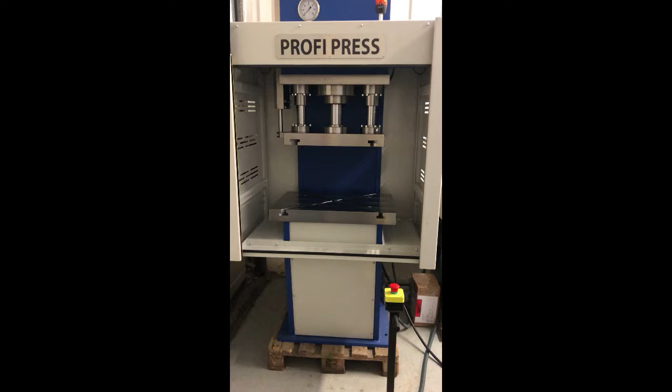I'm going to give a little rundown on the Profi-Press from RHTC PPCM-50 C-Frame Press. Bear with me, I'm doing this on my own, so it might be a little shaky, but it should convey to you what the features are of the machine. The PPCM-50 is a C-frame press from RHTC with 50 tons of pressure.

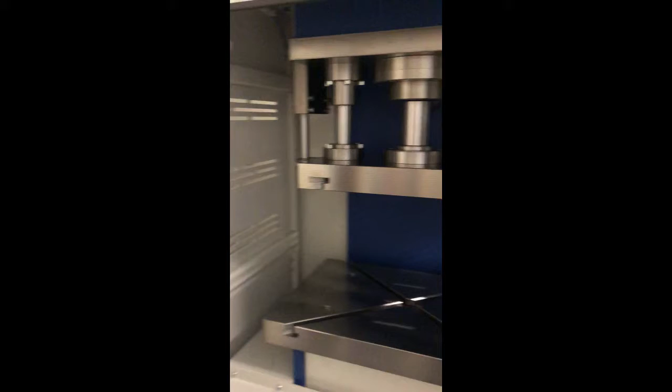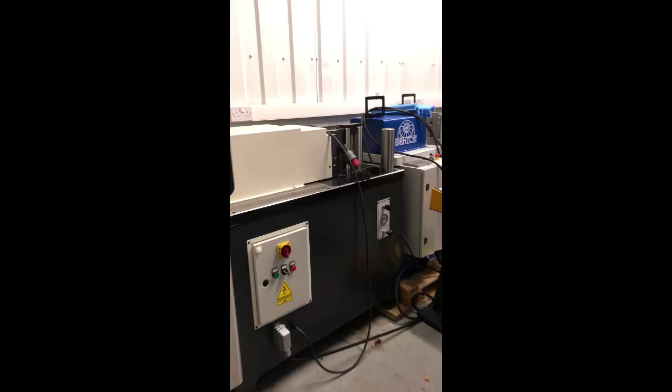It has photo cells for safety features, so if you're using it in operational mode and the barrier is broken, the press stops dead and you have to reset it. These side curtains come open with these knobs, so during manual mode you can set up your dies, your jigs, your fixtures, whatever you may have. There's two knobs on these sides. This side also.

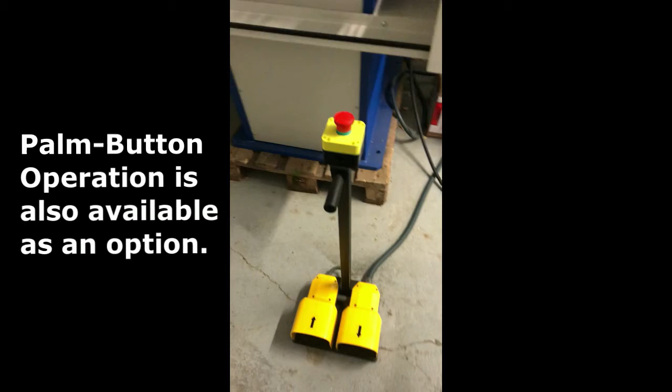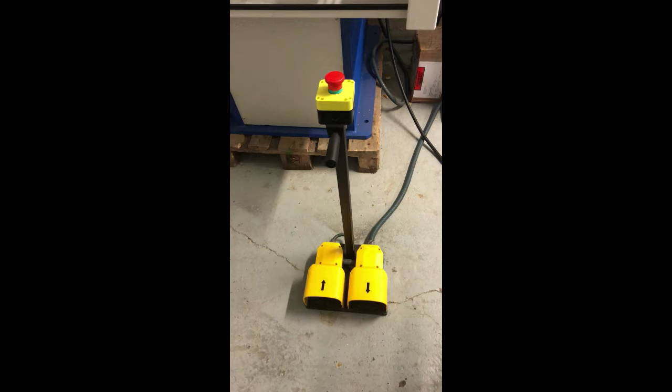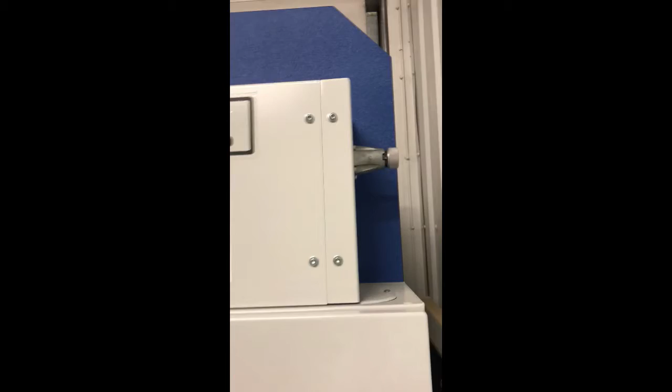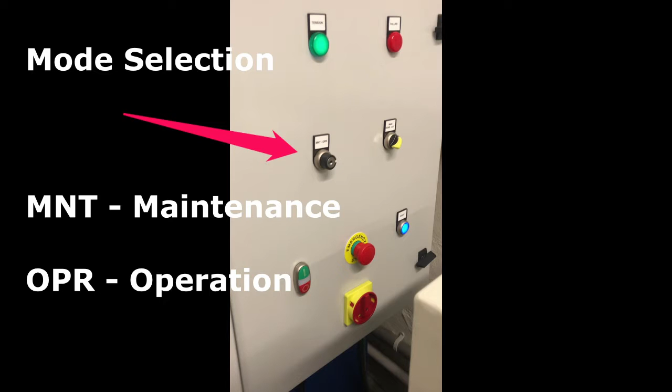There's a foot pedal operation. One foot pedal is for the down function and the other foot pedal is for the up function. The down function is primarily used in automatic and semi-automatic mode, whereas the up one is used in the manual mode for setting your tools up and other similar operations. There's a nice big pressure manometer up there to see what kind of tonnage you will be experiencing. There's a pressure adjustment valve on the back there. And then here's your control panel.

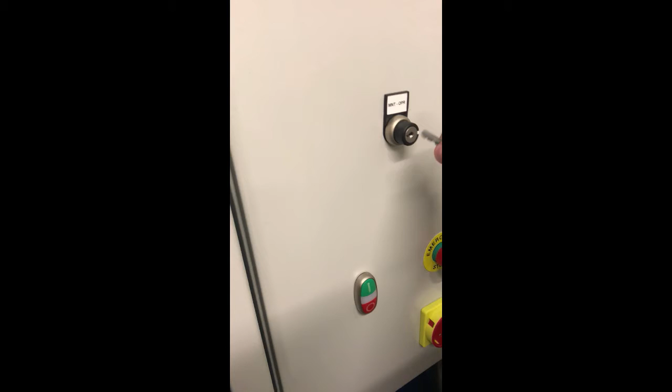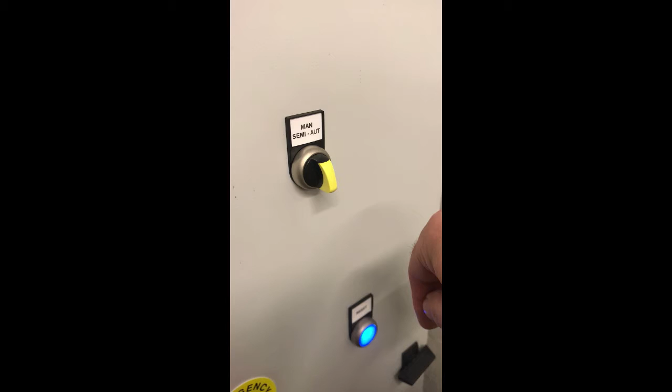There's two operation modes: maintenance, which is MNT, and then you have the operation mode, which is when you're doing production work. There's three different modes. In the operation mode, you have the semi-automatic, the manual, and the automatic modes. Manual mode is usable in both the maintenance and operation mode, whereas the semi-auto and the auto are only used in the operational mode.

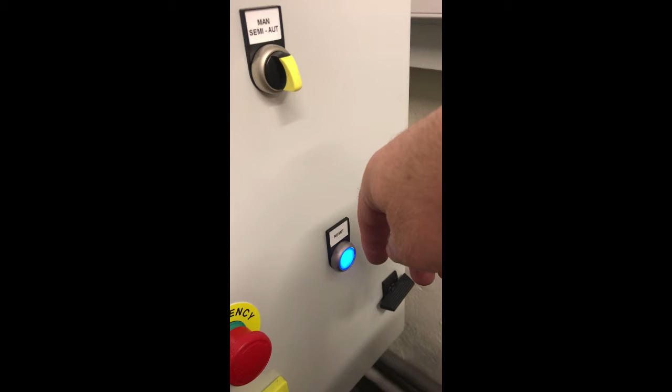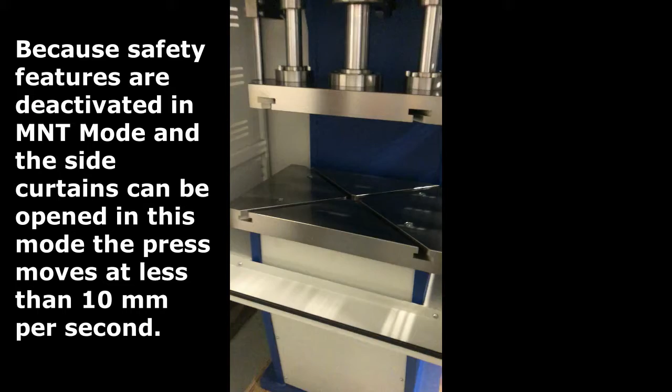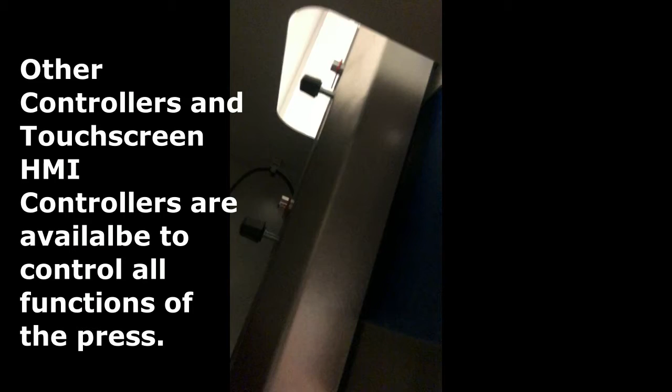So if you're going to set up the machine, you would put it into maintenance mode. Then your reset button will start blinking, and you have to hit that in order to fire up the machine, and you turn on the pump and press on the right hand foot pedal to move the press down. And overall, if you take your foot off, it'll stop. And this stroke is being controlled by these two micro switches here, which are adjustable just by a thumb screw. Simple as that.

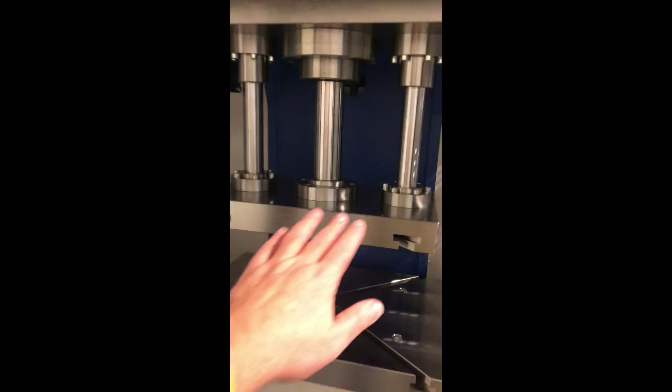When you're standing on it in the manual mode and it hits the bottom micro switch, it'll stop. Now my foot's off, I have to take it back up and it'll go up until it hits the other micro switch on the top side. During this mode, you can have the side curtains open and you can break the photoelectric eyes and nothing will happen. This mode's meant for setting up your tools, dies, jigs, and fixtures, as I've said a few times now.

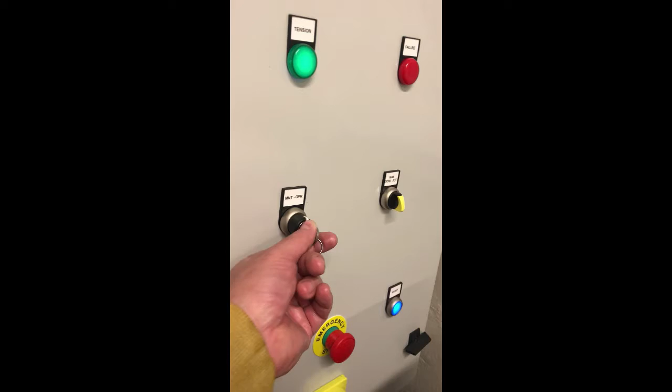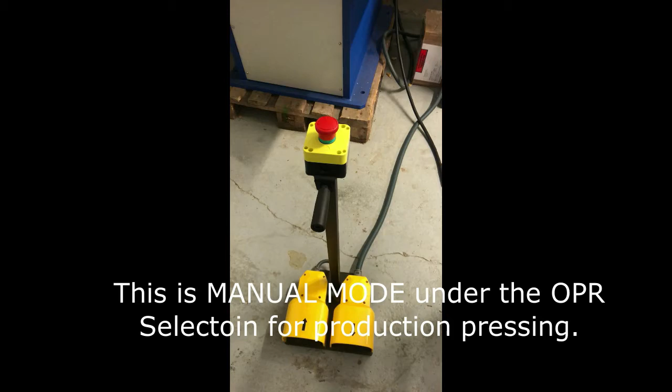You can then move it into operation mode, and your light will start blinking because you need to reset it, but the idea is that you remove the key and lock it away in the foreman's office. You hit the reset button. So now we're in manual mode. And manual mode, in the operator's mode, you only need to use one pedal. And now you can see it's moving a lot quicker. And when it hits the bottom, it'll pause. And now, because it's in manual mode but in operational mode, I have to hit the right-hand foot pedal and it'll return.

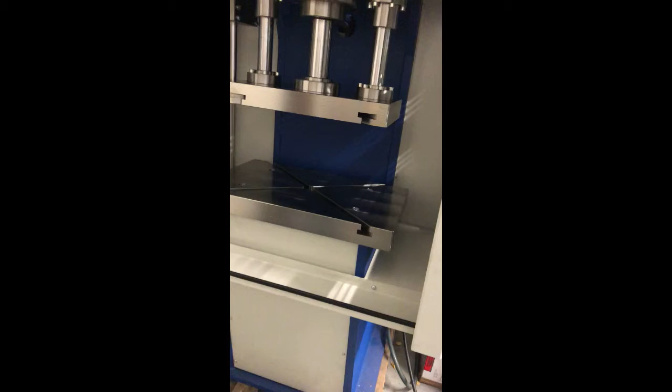But you can see I just broke the plane with my hand. It stopped dead, and that is for both directions. I have to go back over here and reset the press. And then I can go either direction, I believe. But if I put my hand in again in the downward direction, the light is blinking again for reset. So then I'll return it to the top. It'll go until it hits the top micro switch. Right.

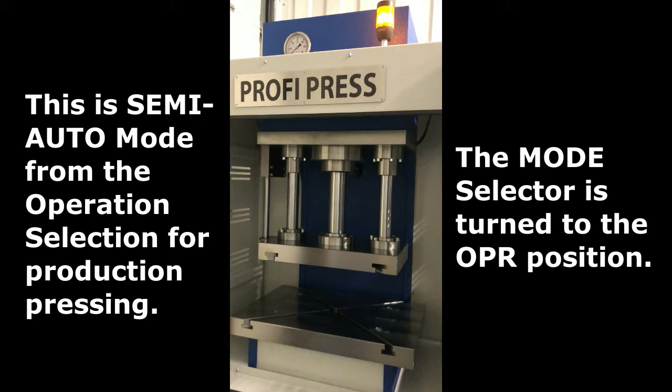So then I'm going to put it into semi-automatic mode. And basically with this mode, what happens is I'll step on the right-hand pedal and it'll go down until it hits the bottom micro switch, pause, and return. But if I take my foot off during the operation, it stops. But when it hits the bottom, it will automatically return.

Okay, and then the next one is automatic mode. And basically with this, it's very similar to the semi-automatic mode, but you only need to step on the pedal one time. And it returns. So I'll step on the pedal again. You can see the light engages on top to show that it's in operation, and it returns.

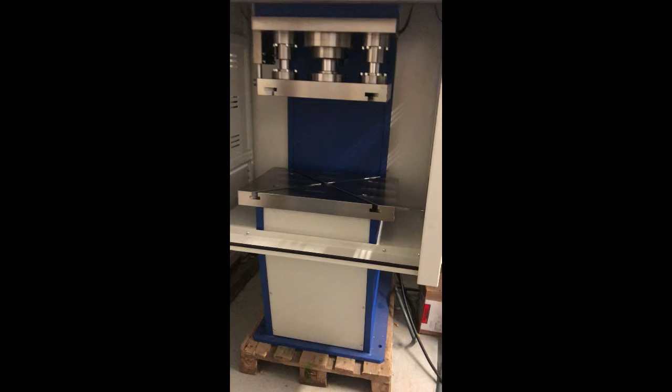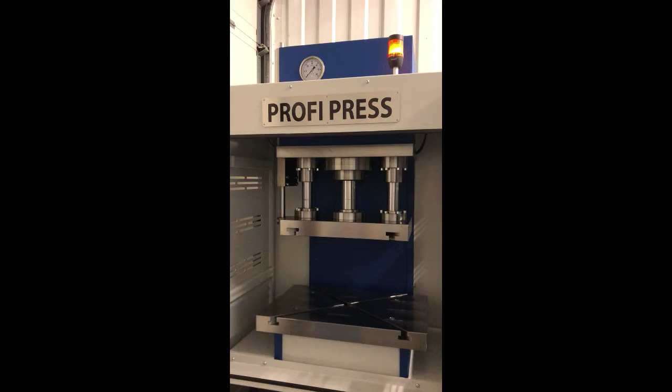Machine now in manual mode and the operation button on manual also. So this allows me to set it up, and what I'm going to demonstrate here is the full stroke of the machine. I have the two knobs set very close together. And this is moving very slow because we are in the manual setup mode. And the light's blinking up on top, letting everybody know that the slide plate is moving.

And then I'll hit the up pedal, and it returns at a much quicker speed. So what I'm going to do here is take it all the way back down to the bottom. And I'm going to adjust this top knob pretty well far up there, so we just have a shorter stroke. See what happens here. Okay, so that's the stroke I established. This is a bit shaky, I know.

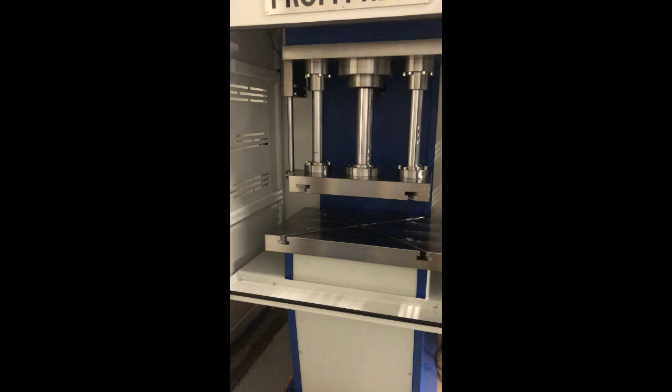Okay, so now I'm going to flop it back over into automatic mode. And I'm going to have to hit the reset button here. I'll take the key out to demonstrate, and I will put it into semi-automatic mode now. And you can see the shorter stroke. And all I'm doing is each time stepping on the right-hand pedal. But I have to keep my foot on the pedal. When I take my foot off, it stops. Until it hits the bottom, then it'll return automatically.

So if I put it over into automatic mode on the operation button, we'll see what happens now. All I have to do now is depress the right-hand foot pedal. And it'll cycle each time you step on the right-hand foot pedal. And when the slide plate is moving, that light comes on.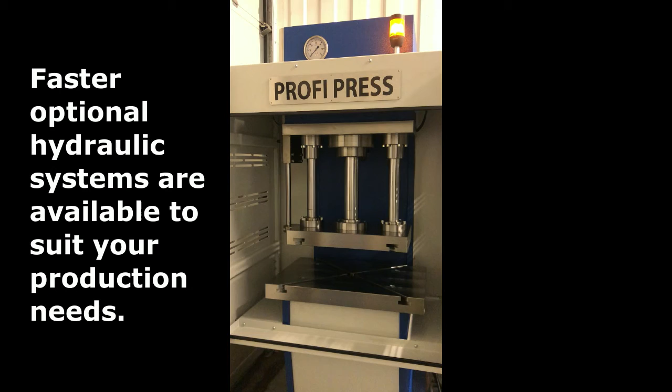So just to give an example here, I'm going to move in a little closer. I'll step on the foot pedal, stick my hand in there, it stops dead. Now I've got to come over here and hit the reset button. And I'll step on the pedal once again.

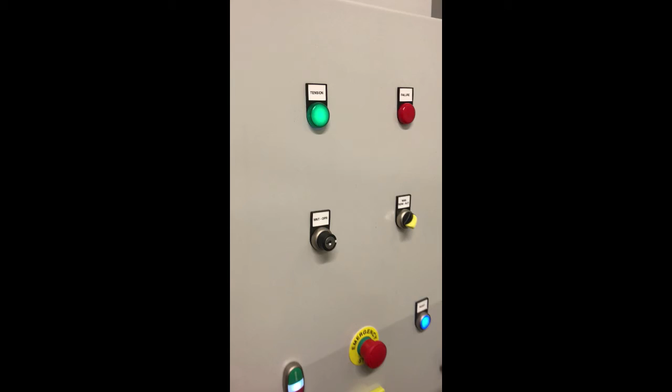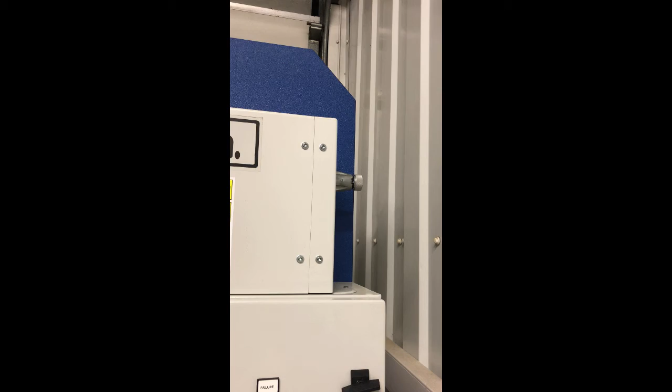And that's pretty much it for the programming of the machine as far as what mode it's operating in and its functionality. Here you can turn off the pump. It has two E-stops, a main switch, and I think I said it before, but you can control your pressure up there on that pressure control valve. So you can dial in from very low pressure up to 50 tons, and you can see the warning display signs, everything else on that. Yeah, I think that's pretty much it.